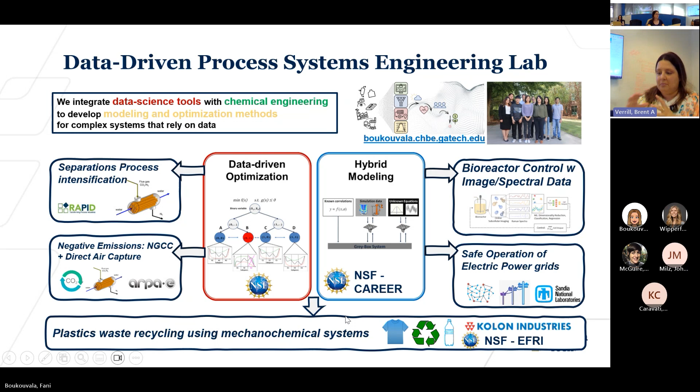And so because we're looking at all these different scales, that's where some of the data science stuff we do fits in. But today I won't really talk too much about the methods, but specifically on the application. So, yes, we were talking about this. There's so much in the news on plastics about the fact that plastic recycling is a myth.

And to some extent, the rationale behind this is that we recycle very little, and there is a history of companies pushing for recycling, maybe knowing that the technology is not there yet for us to do full closed loop recycling, but perhaps the customer feels good thinking that, okay, we are recycling, so I can use as much plastic as I want because it's going to be recycled. And that is not the reality right now. So some of these articles have a point in terms of it's not done efficiently right now.

And most of the recycling today is done through mechanical recycling, which is partially efficient because every time you heat the plastic and remold it into a new form, it loses some of its properties, so it will have to use virgin raw materials as well. So it's not as efficient as we think.

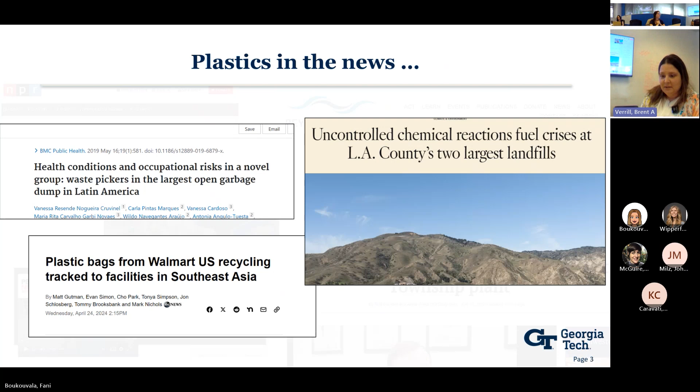And there's a lot of things that also come in the news in terms of big breakthroughs, new research that promises to revolutionize recycling, and then the news that all chemical recycling is a myth. So you really have to read everything, but my personal view from being involved in this space is that, yes, we need to design these chemical recycling systems factoring everything in, but not completely immediately discard everything, because there is some hope.

There are some things that are happening in science lately that could lead to sustainable and overall net positive chemical recycling strategies. So, these things talking about breakthroughs, for example, can you give a sense of what the breakthroughs are? Yeah, kind of the most salient.

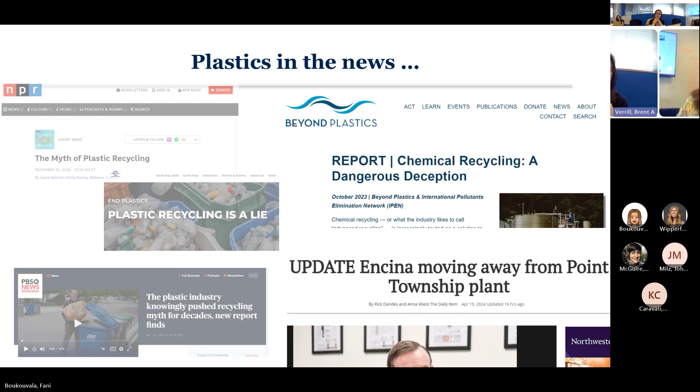Yeah, I'm also curious what the land requirement is. It's almost the same as the biofuel argument. Yeah. So, of course, you need to be careful with what is the resource you're planning to use. Yeah, definitely. Okay. So this is all in the news.

And so now going a bit into what is happening right now, it's a more linear economy. It's kind of crazy to think that we started mass producing plastics only in the 1950s. And recycling has increased over the years, but still less than 10% of the plastic ever produced has actually been recycled. So there are a lot of efforts, as you said, here in Europe, everywhere, to try to transition to a more circular economy.

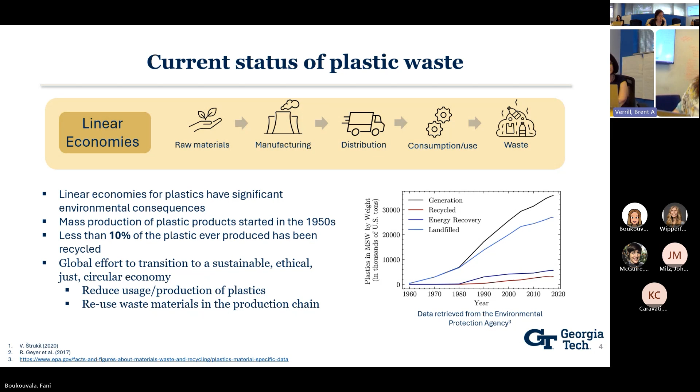And I think the argument's also that we should be careful who's pushing for what, because obviously we don't want to increase plastic use. One way to do this is to also reduce plastic use altogether. But also, whenever we can, in a sustainable way, figure out ways to actually recycle it and reuse it. So currently, about 80% of US plastic is sent to landfills.

Other parts of the supply chain are sorting facilities, where different plastics, when they are taken from our bins, are separated and compressed into a bale form. There's pre-processing facilities that shred them into small pieces. And then there's all these different types of recycling approaches. And in the literature, you may find a little bit different.

So energy recovery is one, where unseparated mixed plastic waste is burned to recover energy. That is one thing that we have been doing. Mechanical recycling is where plastics typically need to be sorted into the different grades of plastic, and then they are heated and molded into a new product. This is the most widely used thing we do for certain plastics.

Then there's chemical recycling, which in literature, you might find both C and D, chemical and feedstock recycling, referred to as chemical recycling, but in my talk, I'll distinguish it. So chemical will talk about anything where, using chemistry, the plastic is actually made back into its own raw material that can be used to make the same plastic over and over and over again.

Feedstock recycling is when we decompose the plastic into other products, so that you can still use chemistry to make, let's say, oil, like different types of fuel oils from decomposing plastics. So you take a bottle, but then make it into something that someone can use to power their car. And there's a lot of pushback on that, in the sense that we would be taking something but then making something that creates more emissions. But others say, well, then that means we have less dependence on extracting more oil. So there's a lot of things that need to be considered.

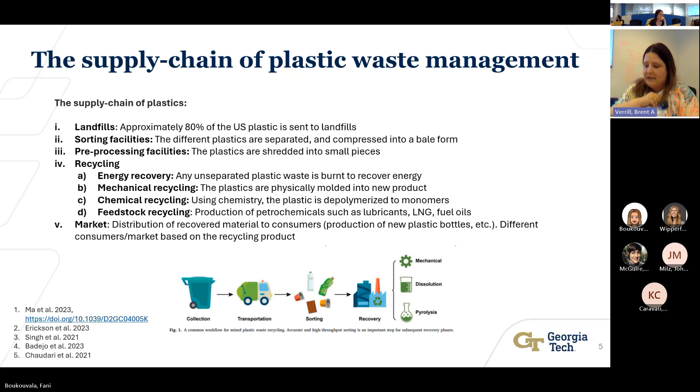And then there's the market, where the recovered material goes back to consumers. And sometimes, this recycling process creates different markets if the product is degraded and so on. Okay. This kind of goes through a more visual way of showing that there's a lot of connections, right? So we go from the refinery to make fuels or chemicals. So polymers, plastics come from a refinery. Then they are molded into different products and go to the consumers.

They could go into a landfill or be mechanically recycled, but the mechanical recycling route always needs some combination of the mechanically recycled plastic and virgin plastic to maintain the properties that it needs. And eventually, after certain cycles of mechanical recycling, it will have to go to the landfill because it can no longer be reused. There's chemical recycling. Also, waste plastics can be incinerated to produce electricity, energy.

And another technology that's old technology that's actually looked at a lot lately for improvements, on your question of what are some of the breakthroughs, some of them are actually related to pyrolysis. So this is just a visual representation of where this type of chemical recycling process could come in. But actually, in my talk, I will talk to you about yet another chemical recycling route, so I'll focus more on that.

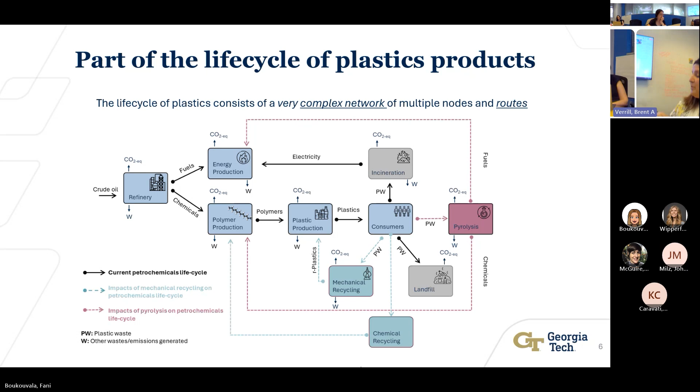But just to show that each of these boxes has CO2 emissions. Each of these boxes may have some waste. And so the whole life cycle of this should be considered when we're trying to see, is this actually going to be a good way to handle plastics or not? Okay. So I've already introduced this: mechanical recycling is widely used, but every time you do it, you deteriorate some properties and it needs to be mixed with virgin plastic. Chemical recycling here is take the plastic and make it into its raw materials.

And a lot of the methods out there, and some of them are the ones that have actually been made into the 11 plants I mentioned in that report in the first slide, use toxic solvents or are very energy intensive, and that's how they've gotten a bad reputation. So if we can find better, effective, economic, and safe methods to do this, it potentially could have a really good impact. And so this is the focus of my talk, and the project that I've been involved with in the last 4 years is proposing something called mechanochemical depolymerization.

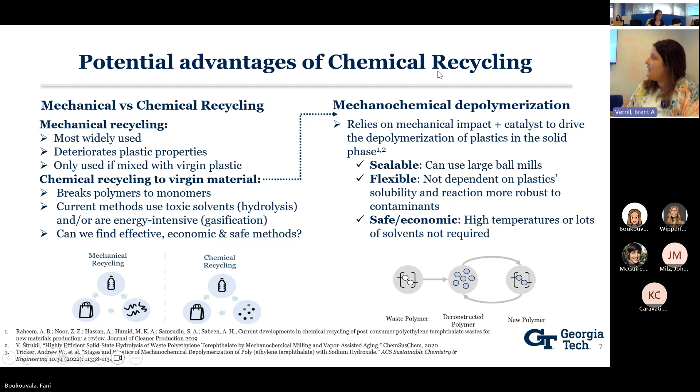And I have to stress, in the next slide, I didn't have this vision; my collaborators did. They are the ones driving all the experiments and the chemistry. I'm the one that helps them model things and assess the impact at scale. So why is this different? From the name, you can guess that it has a mechanical piece and a chemical piece. So you're breaking down things and doing chemistry at the same time.

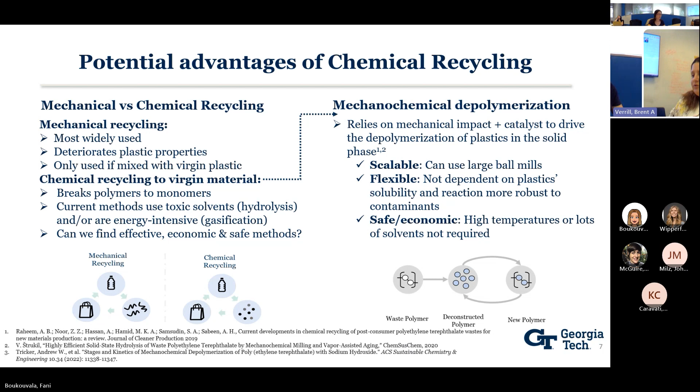This process is done in the systems we call ball mills, which I'll show more. And actually, in a previous BBISS seminar, Dr. Menon was also using ball mills for something related to batteries. So they're actually coming back. It's a flexible process that does not use as toxic and large amounts of solvents, and it can be done at room temperature. So it doesn't need really high temperatures that could lead to other issues and really high energy requirements. So yes, this is the team, our NSF project, which is what started us into this.

Carsten Sievers is the chemistry and chemical reaction kinetics person that is driving this. And we also have Sankar Nair, who is driving the separations piece, Chris Jones, that's the catalysis person, and we have Omar Asensio, who's public policy, and me, who's doing everything I'll talk to you about today.

Right, so even though these ball mills exist in many other industries, they can be scaled, and you see here one, I think, from the cement industry. So as a process, operating them in a way where reaction and mechanical breaking is happening at the same time is fairly a new concept. So we need to understand some of the very basic chemistry and physics that is happening at the process level.

So what you see here is these ball mills are these large processes that either rotate or shake. They have heavy steel balls in here, and then you put in your plastic and a catalyst. And as collisions between these solid-solid interactions happen, here are collisions. At the collision, high temperatures are created, but very locally, right? So the whole process can be operated at low temperature, but reaction happens at those collisions.

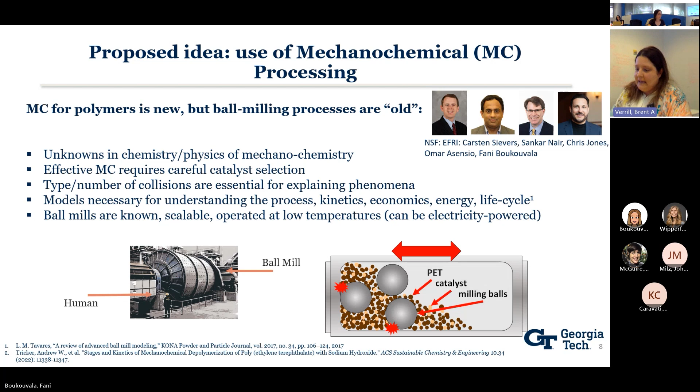And of course, we won't stop there. So really what my lab does in this project is we go from helping model the ball mill process in as much detail as possible, but we don't stop there. So we go from the particle to reactor scale, but that's just one unit, right? We need to have separations that come after that would separate the product of the reactor into the raw materials that we want. There's recycle streams and lots of things in there. So we then look at the process scale simulation.

And then we've also done some work looking at the larger scale, meaning the supply chain. So we've looked at, okay, now that we have an estimate of what this process would look like, what this process would cost, what scale we can operate it at, what are its environmental impacts, what would happen if we were to take the supply chain of plastics in Georgia and build a plant that does this versus mechanical recycling, what would the impact on the supply chain be?

So starting a little bit at the more fundamental scale, I won't go into details, but we start from lab scale experiments, right? And this is Carsten's really tiny mechanochemical setup where this is a ball mill that shakes. This is a very slowed down video, and it's the simplest one that you can think of. It's just one steel ball in there just for you to see what happens. But you can actually do experiments with many balls in this tiny reactor and different types of feeds.

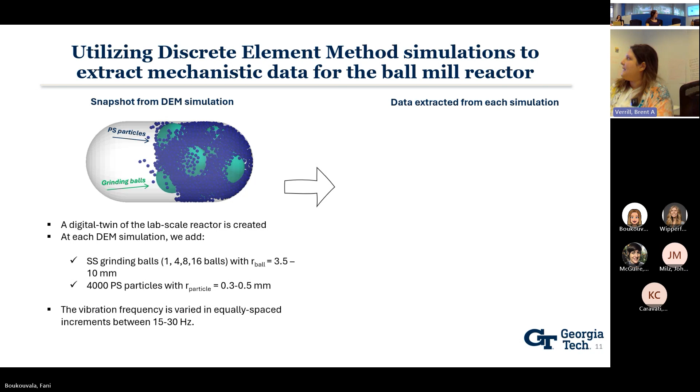The simulations get more complicated. We put particles in there and balls, multiple, and we can get things from the simulation like the exact movement of the heavy balls that drive the collisions, that drive the reaction, forces, distribution of energies. And this information all helps us develop a model that can predict what's going to happen at larger scales.

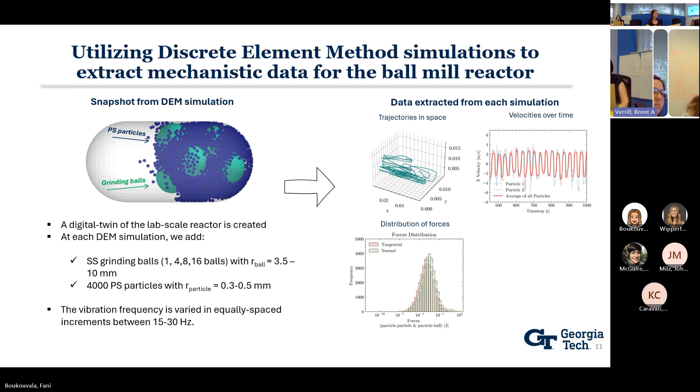Yeah? What is the scale of these images? When you do this in the lab, I guess that's not the industrial size facility. No, because it's very early stage. So the idea... How big are these grinding balls? Is it a tiny thing or is it a big thing? How big should we be?

Yeah. So this one, they're like this. Pretty small. Okay. Yeah, pretty small. I can't remember actually, these are the diameters of the balls. Millimeters? Yeah. So in the neighborhood of 2 centimeters. Yeah. My eyes don't look very good.

At the same time, you'll see later on, once we have these models, that essentially to train these models, you need material properties of the balls and the polymer, right? And once you've captured the parameters, and there's a lot of physics behind these, if we scale it up now, if we put thousands of balls, we have built a simulation of an industrial scale ball mill with thousands of these balls that are much bigger. Carsten can't build that in his lab, but I can build it in my simulations, right? So that was the original idea.

We can still get estimates of the distribution of collisions that happen. And so if that scales, we can say, okay, we need this much residence time at that scale, this much electricity at that scale to get to the conversion that we want. That was the original idea. Yeah.

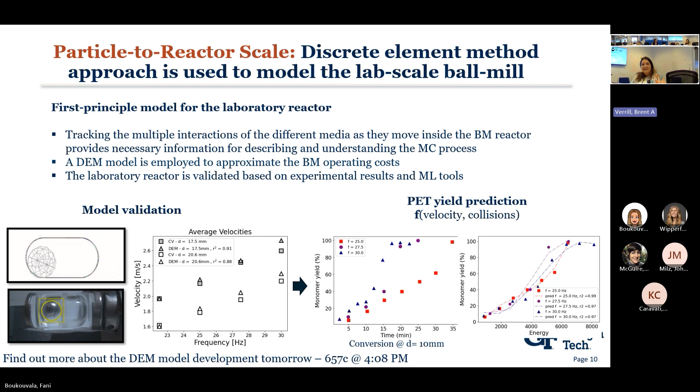So, very briefly, we start from the very fundamental scale. But then once we have these conversion models at the process scale, we can now think about what the entire process would look like, right? And we need several other units, as you see here, for separations. And this is where Sankar and his students come in, and they have a big lab where they have all these different types of separations: membrane separations, crystallizations, distillation columns.

And we did a long study of trying to find the best sequence of post-processing steps after the reactor, to get to the product that is the recycled terephthalic acid, TPA, which is the monomer that can be used to make PET again. We need to use some water, but this can be recycled. And we do need to use some other chemicals like caustic, which is not that bad, or acetone.

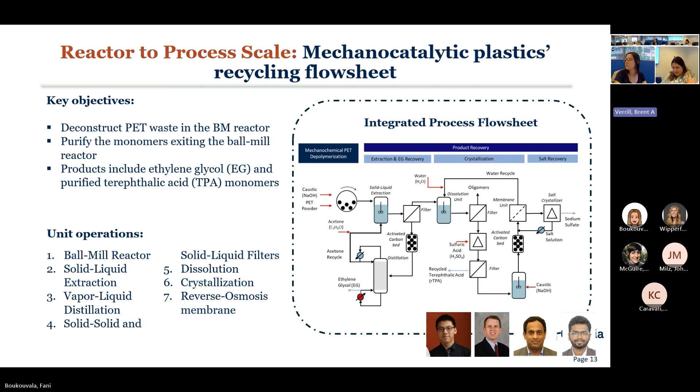So I have the reactions here. Essentially the reaction that's happening here is PET and caustic produces ethylene glycol and Na2TPA that is then converted to TPA. So just acids or bases? Yes. Okay.

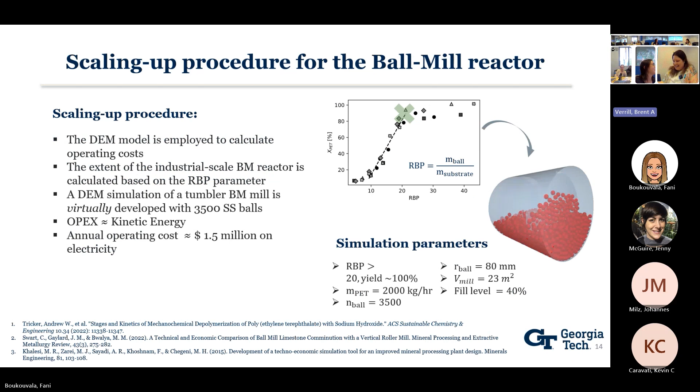Okay, and you can see that whenever you ask me a chemistry question, I freak out. It's okay, I'm a failed chemical engineer that led to being a chemist. I'm also having panic attacks every time you show those flow charts and balanced equations. No, don't show that again. Don't do it. Okay, I'll go a little faster.

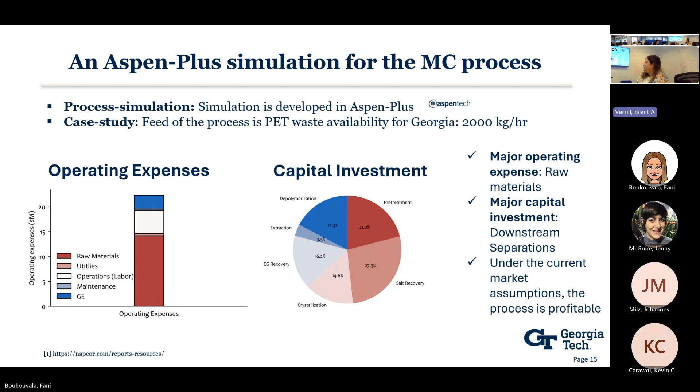But yeah, with this process flow sheet, what can we do? We can estimate at this scale of, let's say, processing all the PET produced in Georgia, the operating expenses, how much raw materials, utilities, and so on are going to cost, and the capital investment. As chemical engineers, we start with cost, but we don't stop there. We see that the utilities are low. The majority of the operating cost comes from the raw materials, which we expected because this process is not operated at very high temperatures.

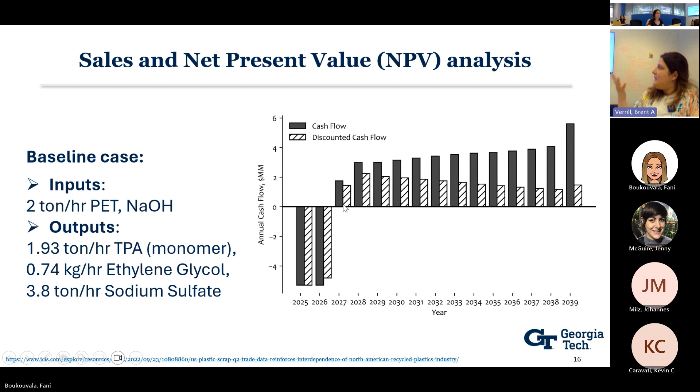Which raw materials? The steel balls? No, it's the PET. The PET and the caustic and those. Right. But it will be waste. Yes, and so this is why we do analyses. So if we were to build this plant, the cash flow, assuming we build it in 2025 over to 2039, we can become profitable after 3 years, assuming some specific prices. And this goes to your question of, what is the cost of PET bale right now?

We do sensitivity analysis to see if there are different policies that will affect the waste price of PET. Of course, the process can become more profitable. We started with ideal PET flakes, but the approximate cost of PET waste is here. So it could be even more profitable if there are subsidies or things like that which would make using waste PET more profitable.

Generally, by doing the sensitivity analysis, we looked at other aspects like replacing the membrane over its life cycle, changing some temperatures in some units, or replacing the steel balls, as you said, because after some years they will have some degradation. But these are very small costs compared to what would happen if the feedstock prices change. So the feedstock is what's really driving the economics here.

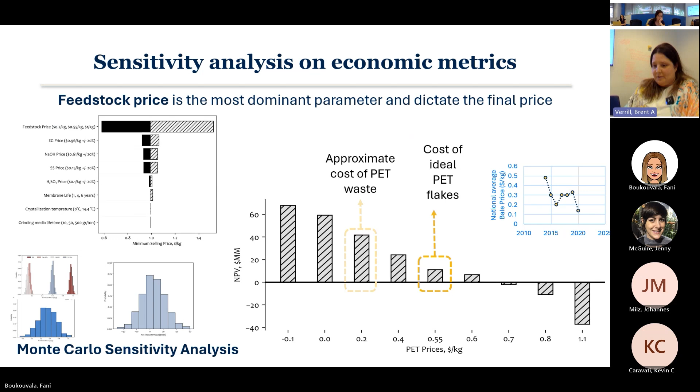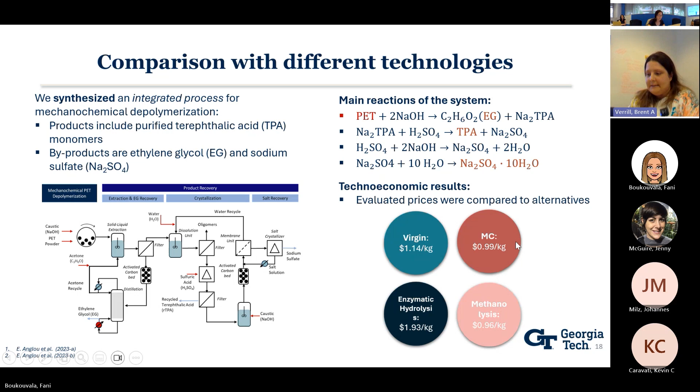And we compared it. Similar to us, there are other chemical recycling strategies being proposed, like enzymatic hydrolysis, where we use enzymes, more of a bio process, and methanolysis, where methanol is used to do the depolymerization. There's literature out there with the cost per kilogram of these technologies. So where do we stand? And also production of virgin PET from the traditional route. And so we do okay in terms of cost, right? Which is important.

But yes, this is something that my student has been working on as part of Valerie Thomas's class that she's taking this semester, and in collaboration with Patritsia, on now looking at the life cycle of this process, right? So the boundary here is, we're assuming the waste is coming in, we're doing our mechanochemical recycling, and then we're also making plastic again, right? We need to factor in the fact that we made this product, now we need to make it into plastic again. So factoring the emissions, the waste, the resources around this entire boundary, okay?

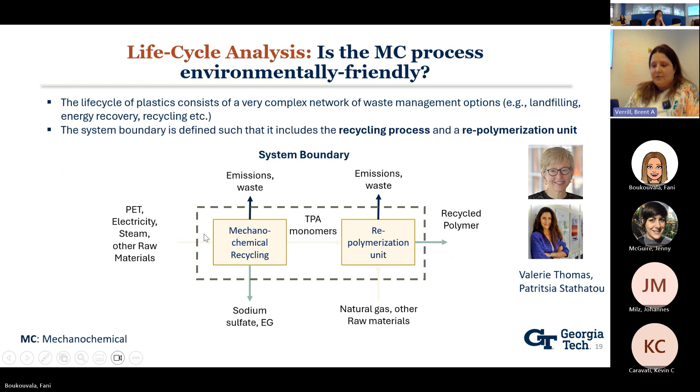And so in doing so, and I am new to this, and so some of the things here I don't know all the details, but Valerie really helped Elizabeth do this, and I am very grateful. So you look at all your inputs, electricity, steam, materials, all the different chemicals, water, and so on, potential traces of waste that we have, assuming that we've done everything we can in our system to recycle everything, but always in these systems there could be tiny, small particles that may escape in some waste stream. So we are trying to factor everything here.

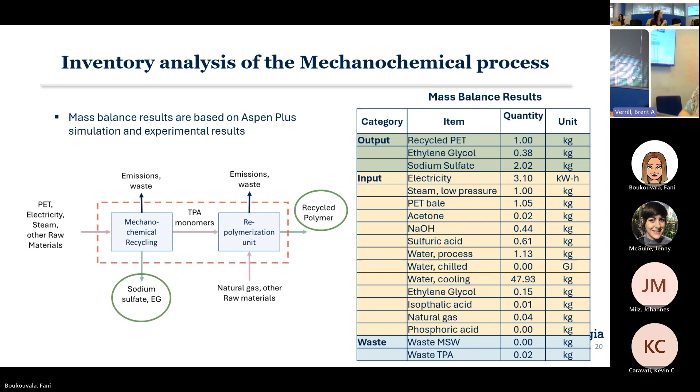And there are resources, databases where you can look at greenhouse gas emissions, CO2 equivalent emissions for all of these different inputs and outputs. And so using these models, we can get a CO2 equivalent for this entire integrated process, factoring also the remaking of the plastic, right? The entire closed loop process. And that comes out to be 3.98 kilograms of CO2 equivalent per kilogram of PET made, okay?

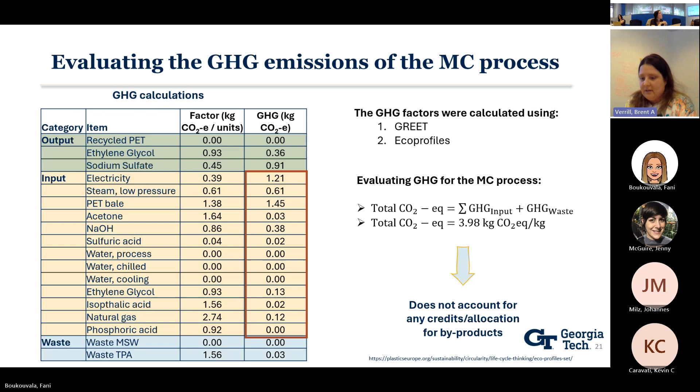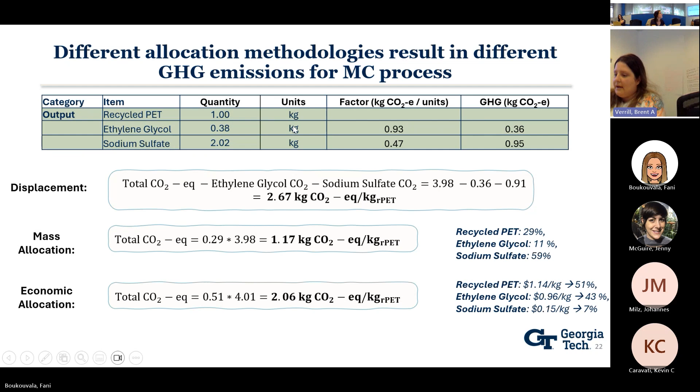Now, this does not account for what in life cycle analysis is credit or allocation of byproducts, right? So through this process, we're making some products that we can then sell, or they can replace or displace the current production of this. And so these are ethylene glycol and sodium sulfate. And so there's different ways through life cycle analysis to account for your adjusted CO2, GHG emissions, CO2 equivalent per kilogram of PET, by subtracting or factoring the effect that you would have by also producing these co-products. And there's different techniques that I don't fully yet understand that could lead to very different results.

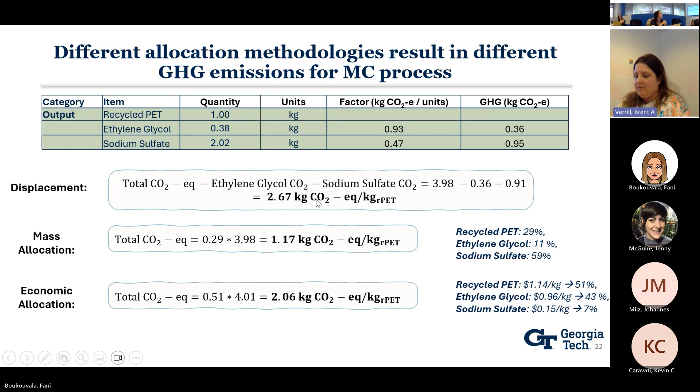But from now on, we will use the more conservative one, which is now we went from 3.98 to 2.67 kilogram CO2 equivalent. So how does that compare to virgin PET production? So, right, if we did all of this and we emitted more CO2, then that's terrible, right? So we are not there. And how does it compare to mechanical recycling? It is higher than mechanical recycling, obviously, because mechanical recycling doesn't have all those units. So this is something that needs to be factored in.

However, when we go to the supply chain level, where you start to look at the more long-term effects of doing mechanical recycling, even if the impacts here are smaller in number, because you will keep on using more virgin PET, ultimately it actually becomes worse. And how does it compare to other proposed chemical recycling technologies? Based on the assumptions, and everything is at a very low early stage, it seems to be doing well. It seems to be promising, but of course we need to keep refining these estimates.

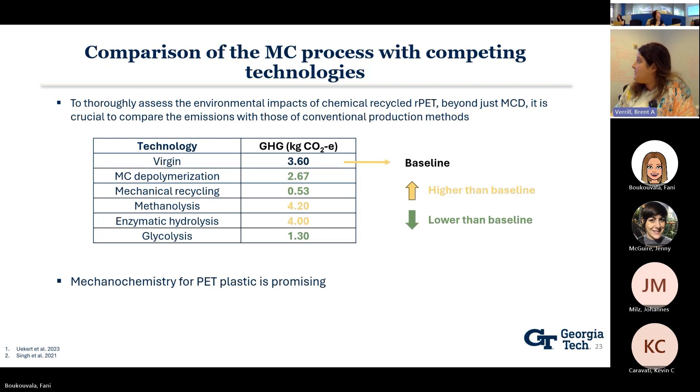And of course, we need to look at these numbers in the context of also the alternatives of landfilling or virgin production and so on. So it seems like, based on everything we have assumed so far, it's doing pretty well. And so far, these are very preliminary numbers. And as we keep learning more about the process, at least now we have the tools to plug in new numbers and see how the impacts could be affected.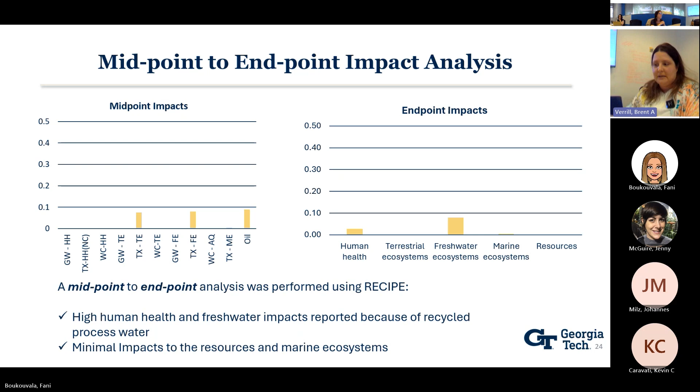So I'll wrap up with how we go to the larger scale, which is the supply chain. So we started with looking at, obviously, because we're assuming we're going to get PET, right? But right now, how much PET is being recycled? How much clean PET? What happens? How is it sorted? How much is there? And so we had this question of, okay, what is the current supply chain of plastics?

You saw one of the earlier headlines I had on the news slide, there's a study where people put tracking devices in plastic bags they threw in recycling bins at Walmart, and they ended up in Malaysia. So understanding the availability, the demand, the supply, and how potentially a new chemical recycling strategy could affect that is important.

So we started collecting data, and we said, let's first focus on the state of Georgia. Of course, that might be inadequate because there could be movement across state boundaries. But for now, in trying to understand what happens at least locally, we collected data that exists from the state of Georgia and EPA in terms of amounts recycled, amounts produced or consumed, and the two most data-heavy plastics were PET and HDPE, high density polyethylene. So even though we're not actually studying recycling routes for HDPE for now, we included it in this analysis.

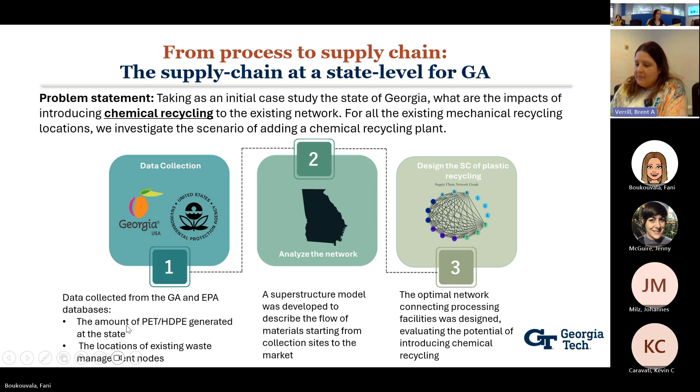And so we have data on where all the transfer stations, landfills, and current mechanical recycling facilities are, so all these PET recycling nodes are mechanical recycling, and where some potential markets are. These are also documented, like companies that could take mechanically recycled PET and reuse it or make something else out of it.

And we formulated a mathematical model that looks at economic and environmental objectives, with some information on demands of these markets and availability. So if we wanted to look at minimizing the cost of a supply chain or minimizing the greenhouse gas emissions of a supply chain, factoring in transportation across nodes, what would that look like? Under different objectives, would the supply chain change, and what is the impact of transportation? And also, if we now embed chemical recycling facilities, what would the impact be? Are we better off or worse?

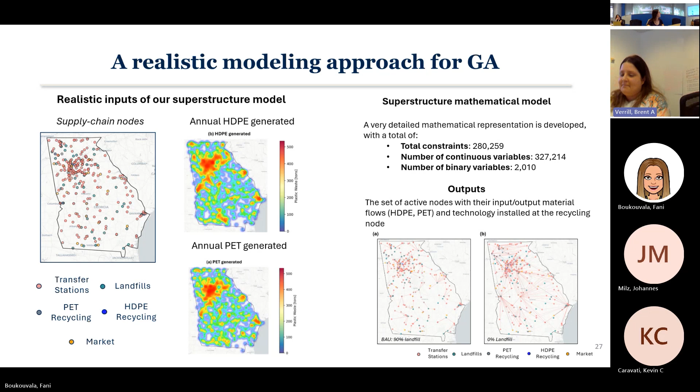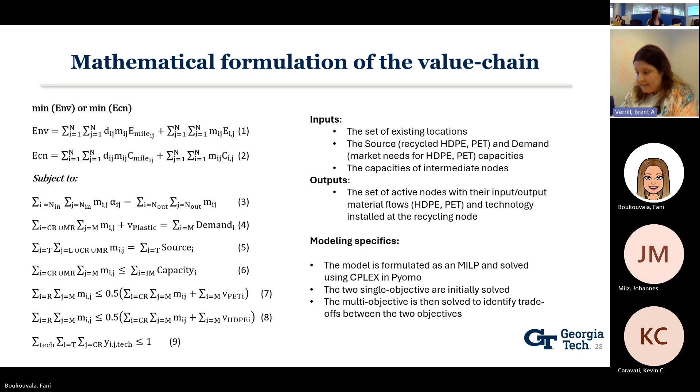So the model looks like this: a bunch of constraints, mass balances of different plastics, meeting demands and capacities of the different nodes and so on, all information we were able to find. The model equations are not that important, but what's important in the results is that we looked at different landfill scenarios. Right now, 90% goes to the landfill, so that's what we call the business as usual scenario. But we see, especially in Europe, policies banning landfills altogether, and in some states in the US, I believe. So we're looking at what if the amount we can send to the landfill changes.

The supply chain problem is solved, and now we're looking at, let's say, all plastics being moved to mechanical or chemical recycling facilities. What is the transportation impact on emissions? What is the impact of PET and HDPE operations on emissions? And we see that with less landfill, we have less emissions, which is counterintuitive because landfill is associated with very low emissions. But what's driving it is the new virgin PET that keeps needing to be replaced, which has very high emissions. So there is a case for incorporating closed loop chemical recycling.

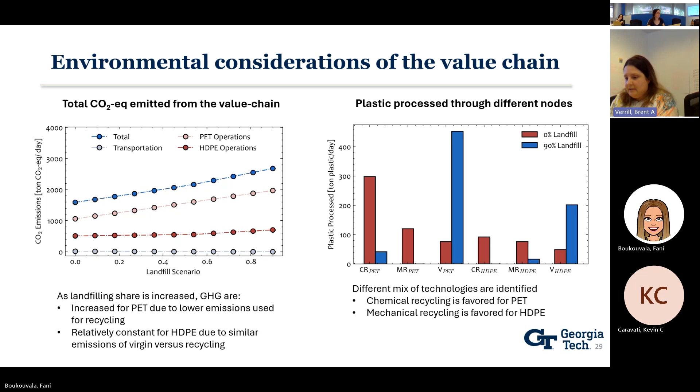Is this why you're looking at PET first? Actually, no, the decision was mostly because it is, in fact, the easiest to depolymerize, which of course translates to the numbers being pretty good. Sorry, but is this graph assuming mechanical, like the current condition? It's assuming that we can pick. The model is picking at the different nodes whether it should do mechanical or chemical recycling under different landfill scenarios.

We also saw something we didn't expect: transportation actually is not as significant in terms of both cost and emissions when it comes to this problem.

Can I ask a question? When you say landfill scenario, that means you're not optimizing, you're fixing? Yes, so we could leave everything free, but that would be a more difficult problem. We're treating the amount that goes to landfill as a fixed decision, as if it's a policy decision, for example, right? And then based on that.

And you assume that it is proportional, like every source of PET would be 40% sent to landfill and 60% available for recycling? Or do you optimize across the entire network to get the 40% landfill? Yeah, we optimize across the entire network, assuming that each of our landfill nodes has a certain capacity. In all, we can landfill 80% or 70% of what we produce. Now, where it goes is up to the optimization. But you're imposing the 80% landfill. Yes. I see.

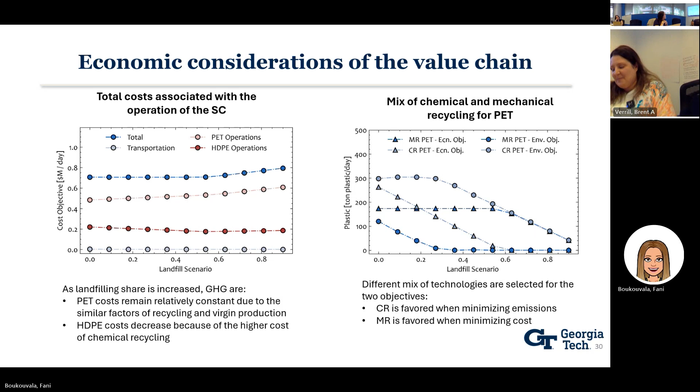But we are out of time. So ultimately, there are trade-offs between economic and environmentally friendly scenarios. You can do what we call multi-objective optimization, and for PET and HDPE there are different proposed strategies. For HDPE, mechanical recycling is actually preferred because the technology, based on the metrics right now, is not good enough to make it as environmentally friendly or economic. But for PET, the current chemical recycling data shows a lot of promise. Again, it's preliminary, but this tool gives us the ability to test different scenarios.

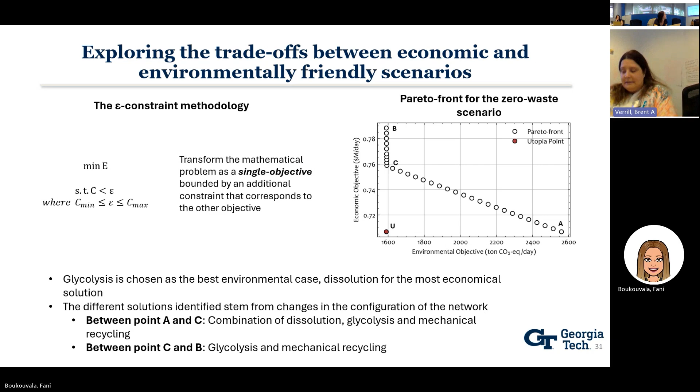So my conclusion is that there is hope, and we shouldn't, based on bad experience with chemical recycling in the past, abandon all hope. But of course, in designing these new chemical plants, we should be very careful looking at all the aspects, and we really need to study further the good questions you asked me today about impurities, mixed feed streams, waste streams, community impact, thorough life cycle analysis and cumulative impacts. And of course, always advocating for reducing the use of plastics altogether if we can.

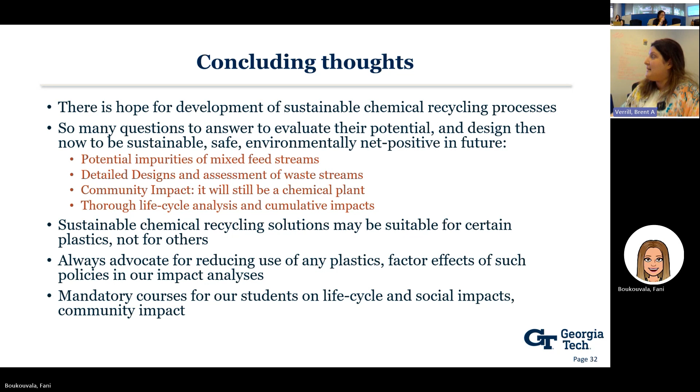In general, I wanted to conclude that through my involvement with you, BBISS, and SCORE, the way I think about this problem is heavily influenced by this, and I really appreciate it. And I think we should really have mandatory courses for chemical engineering students on life cycle, social impacts and community impacts, and this is something I will keep advocating for.

I had something on the bio work we're doing, but I don't want to go into that. I really want to acknowledge the technical team, the NSF-EFRI team, but also SCORE, BBISS, and RBI, who has given us some seed funding to do the bioprocessing work. Thank you.